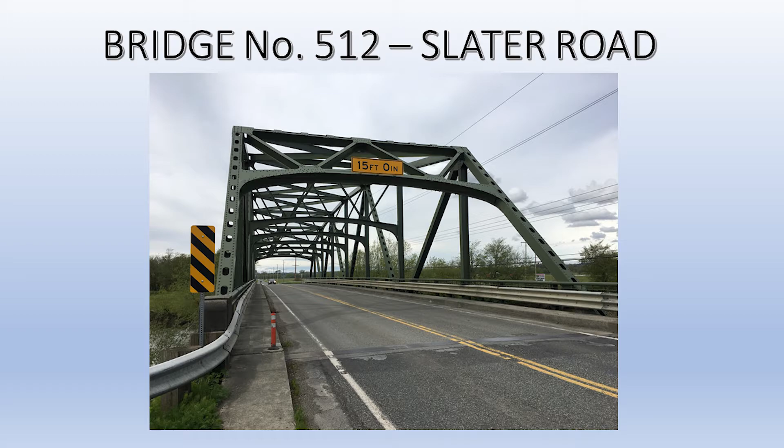Bridge number 512, it's a steel truss bridge. It gets about 13,000 ADT nowadays, though I don't have the current number anymore like I used to. Looking out towards the mountains there, that's Mount Baker in the background, if anyone's familiar with Washington. We're located in the northwest portion of the state, really near the Canadian border.

It was built in 1957, a truss-through bridge. The main max span is 240 feet. It's got a width of 32 feet out-to-out, basically, with a 26-foot curb-to-curb. Vertical clearance measured at the curb line is 15.3, and we post it for 15 feet. But when you measure the center, and it's a curved portal, the center portion is at 17 feet. It's a number to remember, because when you see what hit it at one point, you'll understand why.

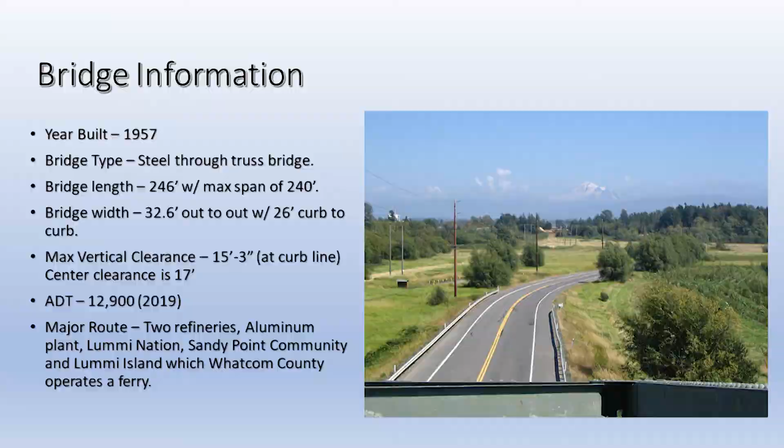Again, it goes to refineries, an aluminum plant, and an Indian reservation. And of course, Indian reservations have casinos, which is a huge deal on this one. They actually had a special going called Broken Bridge Bucks, trying to encourage people to go out. And of course, this had to happen three times that we had to deal with this.

The first one was in 2003, kind of a typical accident. It was damaged on the 23rd, a Sunday. A local contractor was moving equipment, not during a normal work day, which kind of tells you they were trying to do something that probably wasn't supposed to be done. The excavator operator who loaded it did not have the experience, so when he loaded the machine onto the trailer, he did not curl the bucket all the way underneath. He basically sat the bucket straight down, so the boom and stick were up pretty high on this thing.

So he was traveling eastbound. He hit the west portal first, skipped the next cross member, and then proceeded to hit every single cross member across the bridge. A person driving behind him called 911. We contracted Washington State at the time to do all our high-cost bridge inspections, so they came up and did an inspection for us on the damage.

Again, it was a local contractor, and not a small one, which was really a surprise—it was one of our main contractors in the area. So he kind of ate mud on this one. It was a blessing for us in ways, because the local contractor hired a structural engineer for the project, since they were the ones going to be paying for the damage. That structural engineer ended up doing work for us for a number of years afterwards. He was a really good engineer, very good field engineer, so we ended up using him on a lot of projects. That's why it was a blessing to us.

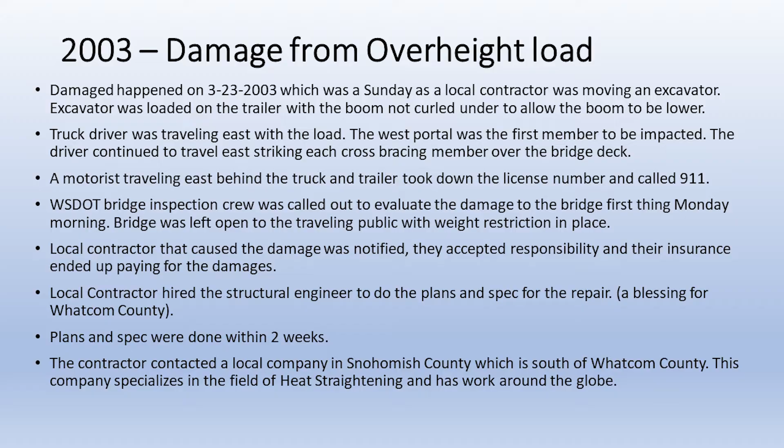Plans and specs were done in two weeks for this project, and then the contractor contacted a local company down in Snohomish County, two counties south of me, a company that does this kind of work. They do this work all around the world, and it's really an art form. There's engineering to it, but the guys doing the work understand heat like you wouldn't believe—they understand how steel heats and how it functions when it's heated. You can kind of see the damage on the portal there where it's been ripped, right next to a gusset plate on a connection point.

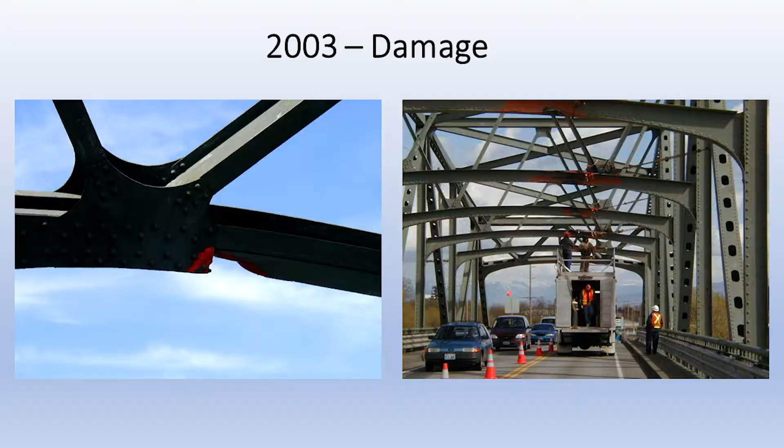And the next picture over, you can see all the orange paint. Now I know our new painting and coating systems nowadays come in different colors, but they're not real different. I recommend, if you can, getting the brightest primer you can, because it shows every bit of damage when you have an accident like this. You can see the orange throughout this whole thing. Orange paint typically has lead in it—well, this bridge did not, and that's a good thing, we got lucky it didn't have lead in this orange paint. You can see other members that are bent on this too.

Engineering cost was around $40,000, and construction was estimated at $125,000. Construction and repair started on the 5th and was completed on the 19th, so we did all those repairs. The bridge was open to one-lane traffic during this particular repair. Final cost for the engineering came to only $32,000, and the final construction cost was $115,000, basically $115,800.

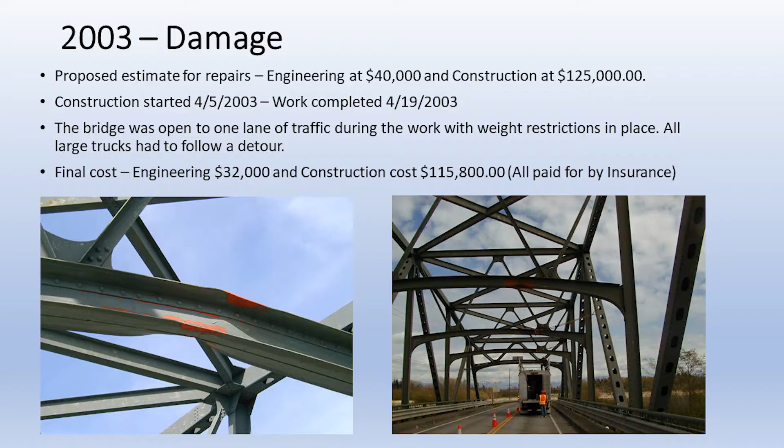So it's a good way to go when you start having to replace steel and add jacks and all your safety stuff and everything else, your costs go way up. By doing this type of repair, you get to leave everything pretty much in place, which makes a big difference.

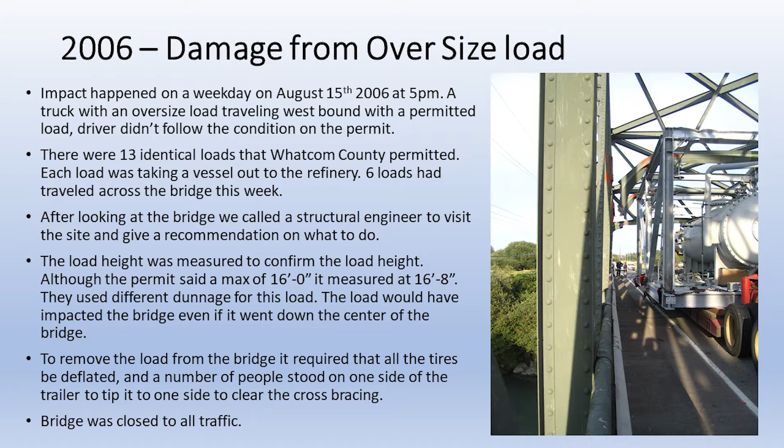Our next one was in 2006, three years later. This one happened, of course, on a weekday, which was good. I had just gotten home and got the call that we had something stuck in our bridge. Basically, this load that was stuck, there were 13 identical loads going to be going over this bridge, going out to one of the refineries. We permitted this load. They actually gave us an application.

We permitted the load, gave them restrictions, told them to drive down the center lane of the bridge, told them to close the bridge down on both ends when they went across. So that was part of our permit conditions on this. The bridge, they'd taken 6 loads across, so everything's been good until the 7th load.

The 7th load started across, and the truck driver claims that a car was coming at him from the other direction, so he stayed to the side. By staying to the side, which is on the north side of the bridge, the load struck the first portal, or the east portal, and then started grabbing, as you'll see in these pictures, the cross bracing. The load had a full cage around it for taking the vessel that was going up.

Engineering cost for this one was $42,600 we estimated, and $139,950 to do the construction. Construction started on 8/24, work finished on 10/1.

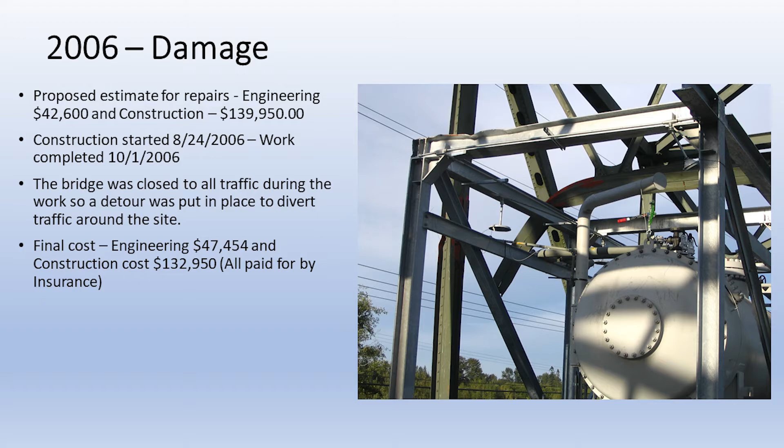When you see the damage on this one, you'll be, I think, a little surprised how fast we got it all done. The bridge was closed to all traffic on this particular repair. We couldn't have any other traffic on this bridge at this time. Engineering cost came to $47,000 for this one to be completed, and then $132,000, almost $133,000, to do the construction.

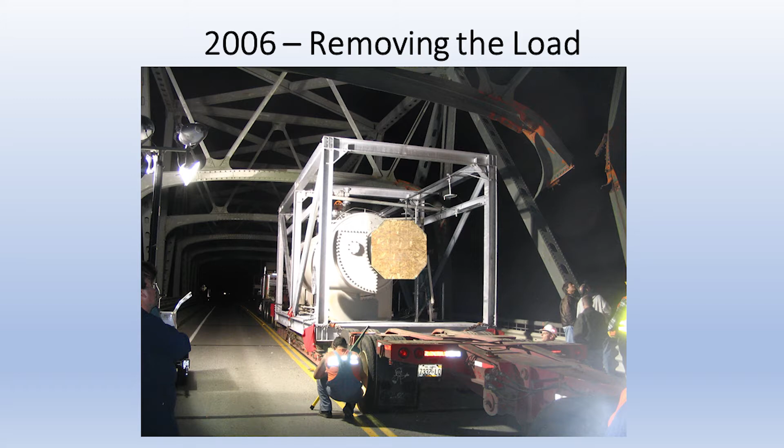So there you can see one of the cross members that are ripped completely off, your vertical. It did it to a few of them, not just one. Couldn't have been that easy. As you can see, there's more damage of those.

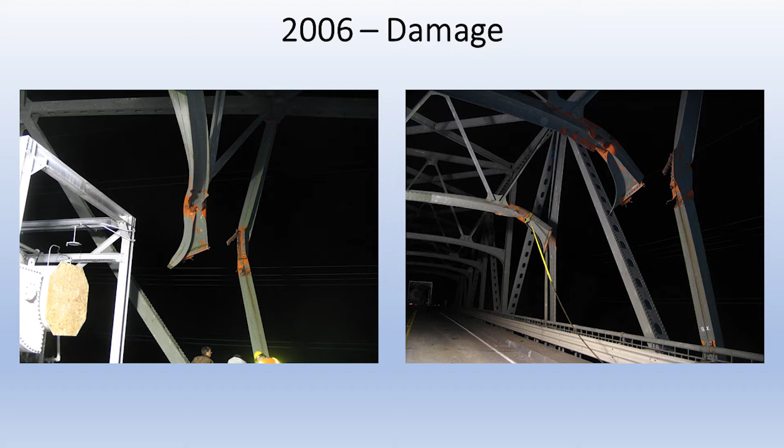Those verticals were out of plumb. The first one was out by 2 feet out of plumb. The other one was out over 1.5 feet. By these being out of plumb, you can imagine the north side cord on this thing dropped. It dropped over 6 inches on this bridge.

Deck and everything, it was in good shape. We didn't see any drop in that. As you can see how this looks as it's been ripped off. The strap you see in there, we put it in there when we were trying to remove the load. We didn't want it pulling on it any more than it already was.

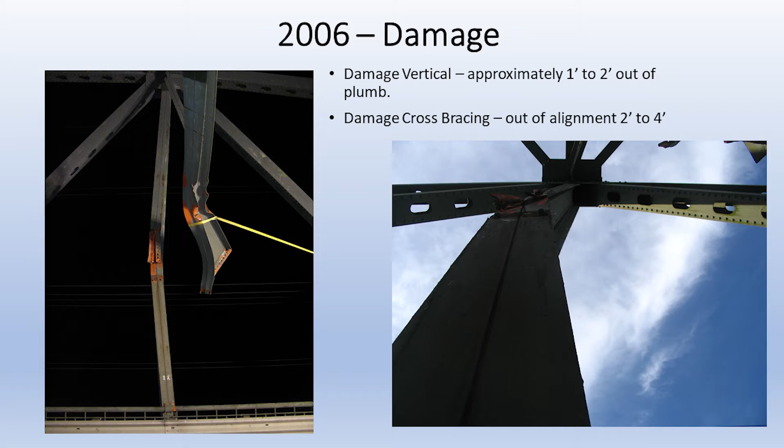Again, I'm just trying to show some of the pictures of the damage, the out of plumb and everything on this thing. Some just localized issues throughout the bridge. Railing gets damaged when something like this happens. It's not just your verticals and your cross bracing. You start looking at a bridge, it's everywhere all of a sudden when you have these kind of issues.

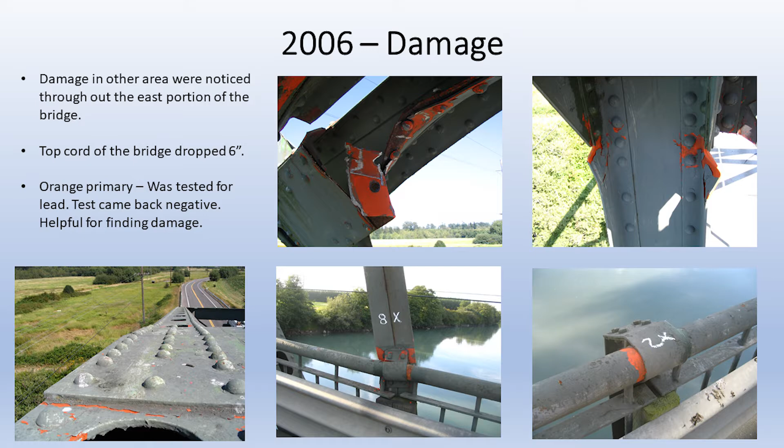And again, why I said orange paint is great. You can just walk the bridge and start seeing all the issues right away. And here on the lower left corner, that's just looking down the cord. You can't tell that it's lower, but it was 6 inches lower.

Here we're starting the repairs. So with heat straightening, it's all done with heat. I don't want to get in real depth detail on it because there's a lot to it, but basically you're heating the steel to a certain point, and you don't want to go over that point, or you don't want to be under that point.

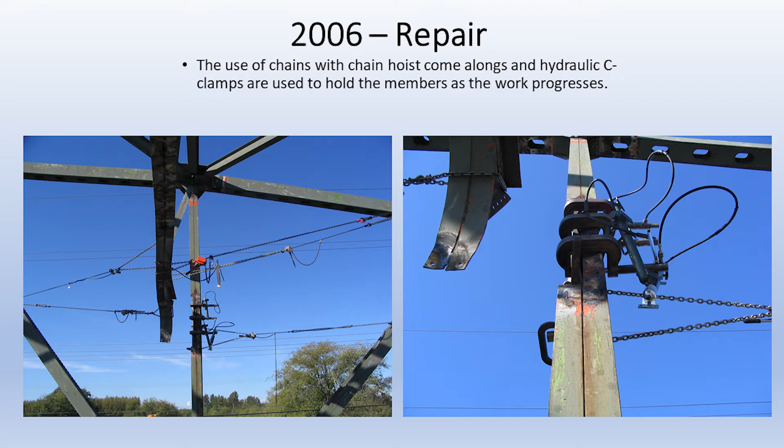And when you see all these braces and chains and stuff, they're not pulling the steel back into place. That's just holding it in place. None of those things are piano wire tight or nothing. By using the heat process on the steel, you can actually make the steel go back to its original shape. You just need to know where to do it, how long to do it, and what patterns to do it.

And that's why it's such an art form. It's not something that you can just pick up and grab a maintenance crew and just go start doing something like this and learn about it. It takes time and a lot of practice to get there.

Here you're starting to see some of the repairs, what it looks like afterwards. You can see that the verticals are straight up and down again, and the cross bracing is back into its place. That's no new steel, that's all the original steel that was on the bridge. It's all been heated slowly and bent back, and it's just a process.

As an inspector, when you're on the site, you just want to sleep the whole time. The process is so slow. It seems slow,

Fortunately, I've been on this repair 3 times now, so I've seen this with the same company 3 times. You can see some of the tolerances we got back. I got up there, the verticals were within 1/8 of an inch plumb again. The cross bracings were all within 1/8 to 1/4 inch going across, and the top cord we got into 1/4 inch.

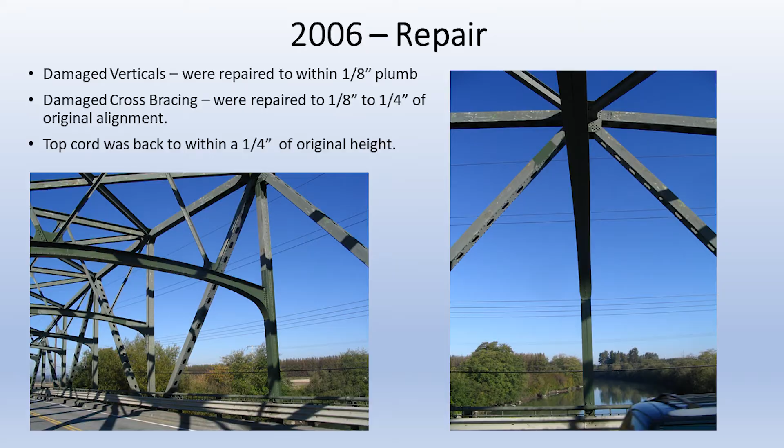And that's doing no jacking. That's just heating the steel and letting it cool correctly. You don't use water, you don't use anything. It's all natural, you let it cool.

Guys that are newer in the business, that have been working with the guys that have been in a long time, they use a crayon to check the heat. It gives you a temperature reading based on the color. You'll find the old guys, they don't like to use the crayon. I tried testing them - they knew what they were doing. Made me look like a fool.

The next one, 2012. As you can see, it seems like every 3 years I'm out on this bridge, or it's multiplying by a few years, but it's consistent. This one again was another excavator going eastbound. It happened on the 24th of the month at 9:30 a.m., so it was in the morning. Local contractor moving equipment, no one knew.

He loaded the excavator exactly like the other guy did. One of the beauties of this one, he started so far away from the bridge that we followed from where he started to where he got to the bridge. If he would have made it through the bridge, he would have hit the rail crossings next, and after that all the damage would have stopped, because that's where he was trying to get to. So he took out power lines, he took out signs, he took out all kinds of things with this, and he just kept driving on this one, which was amazing.

He got called in by a person driving. As our sheriff showed up, this fellow had the machine back on the trailer - he was trying to leave. Lucky for us, when he went through, he had a chain binder on the bucket and it came off. So it allowed the whole excavator to swing sideways, catch the bucket on the railing, help pull the machine off, and put it in the middle of the road. So it gave us time.

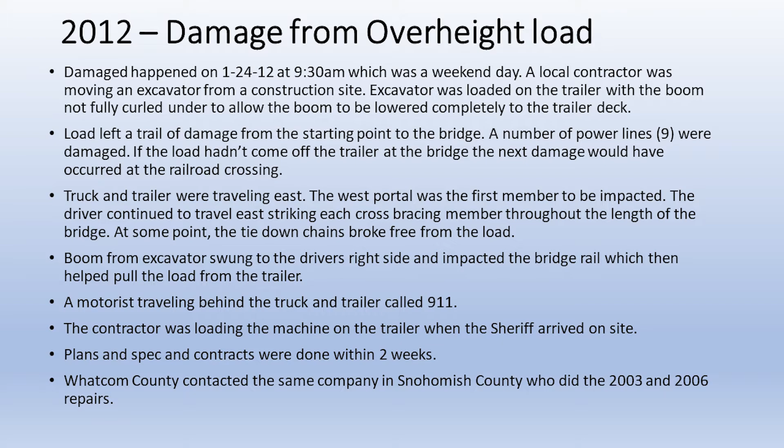Plans again, 2 weeks. I mean, it's almost exactly the same repair as we had the very first time this happened, so it went relatively easy. We contracted this company in Snohomish County again - name of the company, I'll just say, it's Flame On Construction, Flame On. Fortunate for Whatcom County, where they're located, each time these accidents happen, they happen to be home. They're a small crew and they travel the world doing this work, and each time they happen to be home, it was lucky each time for us.

Engineering on this one we figured 30, and the cost was a little higher this time. The reason why is we knew we were going to have to replace some steel on one place. As you can see, as soon as you start adding steel in it, the cost goes up quite a bit more all of a sudden. The only reason why we had to add new steel is because they literally ripped the whole portal apart, so can't fix that. Construction started on the 3rd and we completed on the 21st.

So you can see it's pretty quick work for the most part. And these aren't like working all night long - this is just a 10-hour day, 5 days a week working. We didn't work weekends on this.

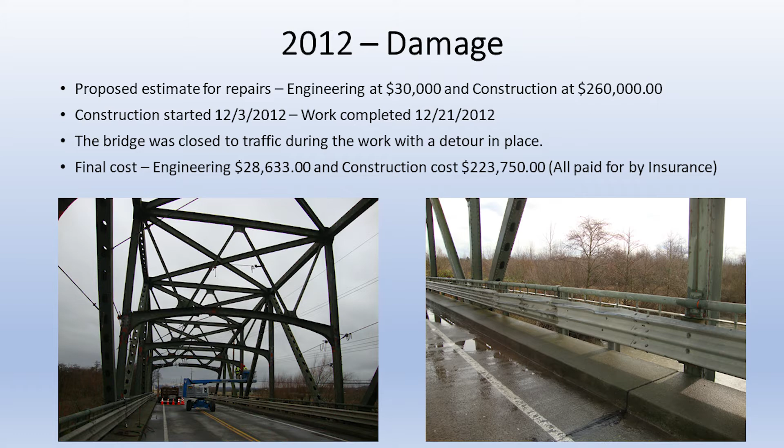The engineering cost came out to $28,600, and the final construction cost came out to $223,750. So each time we've done this, our estimates were really good, so it was a good thing. Of course, every one of these repairs was paid by insurance companies - it didn't cost the county anything 3 times.

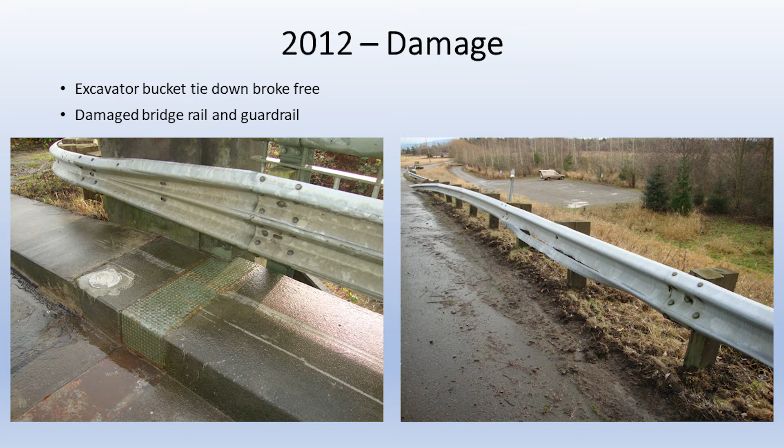So that was the good thing. And just showing the guardrail on the end of the bridge that was damaged from the machine laying there on its side. This is the portal where we had to replace the actual steel.

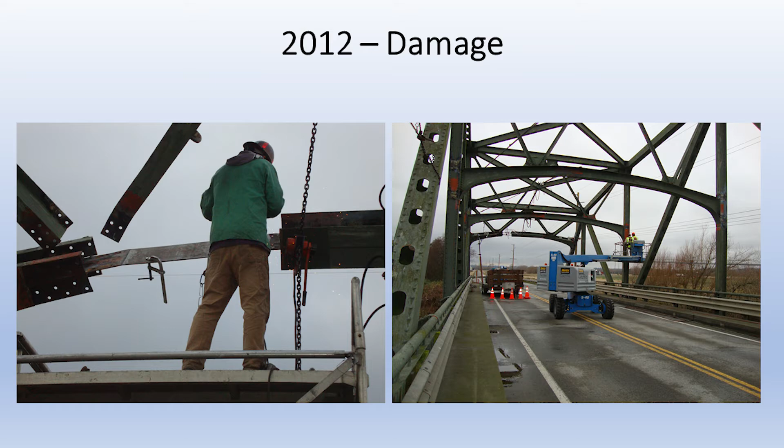They had to cut it out, fabricate new pieces, fabricate it all on site, trying to get the curvature. Believe it or not, we use heat straightening to get the curve in the steel eventually, so it actually all looks like original steel just by using heat straightening. We actually made the steel curved instead of making it straight again.

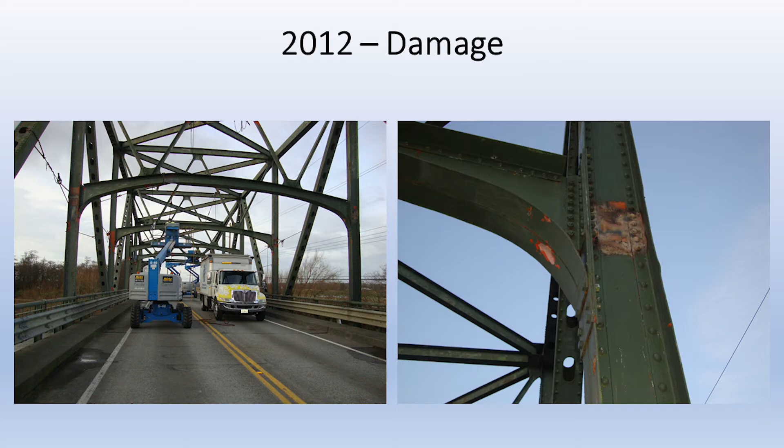Again, manlifts. This time again, we closed the whole bridge down on this one. You can see there your cross members bent the other direction. Now this one's been bent this way twice and once the other way. This is one of the cross members that was completely ripped off. So this has been done multiple times.

Again, same truck, same crew, same guys working. It's real hard to see, but a lot of that when they're doing the heat straightening, it's like I said, in patterns. A lot of times you'll see a V shape in the heating. That's doing the process of pulling the steel or pushing the steel, whatever they need to do. It's much better to be on site and actually see what it actually looks like.

Conclusion on this, Whatcom County has found this is a good way to go. It's been good success for us on this whole process. We do not have - we have one other steel truss bridge, and it's been hit, but it's up almost at 19 feet at your vertical or your portal. And that was just due to a logging load, but it was fixed relatively easy. So we don't have a lot of bridges that have this issue, which is a good thing.

Low cost compared to replacement or replacing all steel, because if you think how you'd have to replace verticals, cross members, if you had to have them all built, fabricated, you can see the cost going way, way up really fast, and time. And then all the jacking you'd have to do, it would take a long time to get some of this work done. That's why we chose to continue using heat straightening.

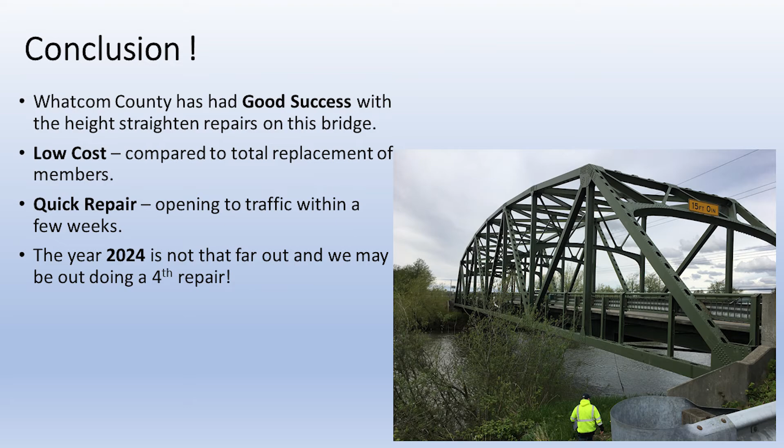As you can see, the way things have been going on this thing over the years, for the fourth time, it should be in 2024, I should be out there again at the rate it was going. It's actually been hit again since then, but it was just on the east portal. Someone hit it with something, we couldn't figure out what it was. It didn't do enough damage that we need to do anything quite yet on it, which is a good thing. The bridge has been repainted since all this work.

Basically, just a little background real quick, the heat straightening process was really found out through welders. Welders were the ones that kind of figured out how to bend the steel, move steel, make it change shape. A fellow named Josh Holt came up with some specs, some kind of form of specs for this thing in 1938. So it's been around a long time. The process has been around a long time. In 1980, most states were still not using this process. So it's actually kind of young when you think about where we are with this work. It's used a lot more nowadays.

All your damage is categorized into different levels when you're doing the heat straightening. So there is some information on that. And there's a good technical report that was done by FHWA in August of 2008, going over the whole process of heat straightening. And if anyone wants that number, I can get it to you if you're curious. But it's a good report.

It goes over it. Just on a side note, we have a ferry landing. I don't have pictures of it. I wish I could have got them in. I was going to, but the last 2 weeks we were in major flood damage up in Whatcom County. We got hit like Abbotsford, BC. Before I left and came here, my last week I had over 70 hours of work in a week. We had lost one bridge in the flood, and we had a lot of damage across the county.